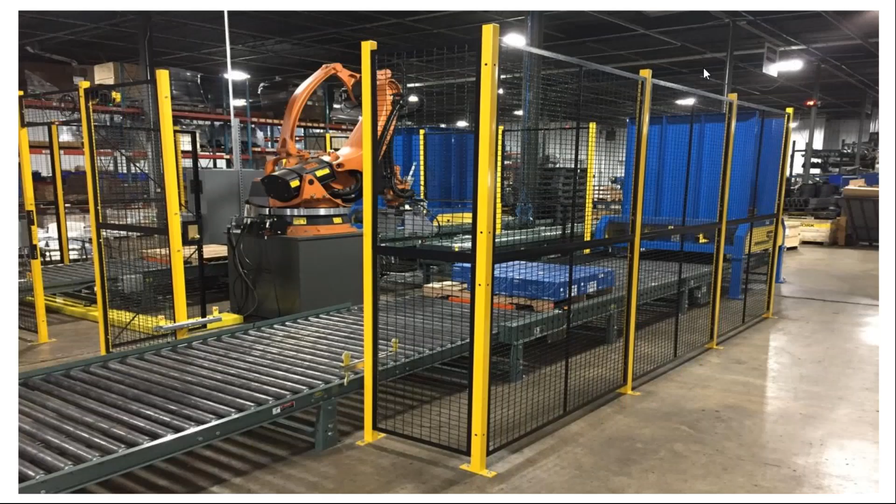This is the principle of machine guarding, in which we discuss the point of operation and zero mechanical state. Under the zero mechanical state, we cover power off, power locked off, guarding, machine guarding, enclosure, fencing, and safety by position or location. All these points are covered under ZMS, and then in-going, that is in-running nip points, and safety by construction. So machine can be guarded.

That need or requirement depends on the conditions. The guarding may be needed because the point of operation is not safe. That may require power off automatically, with the help of sensors - mechanical sensor or electrical sensor.

Some guarding can be done while running, and some guards can be constructed - that is called a fixed guard. Some guards need to be fixed at a particular place at a particular safe distance. So there are some principles of machine guarding which are listed here.

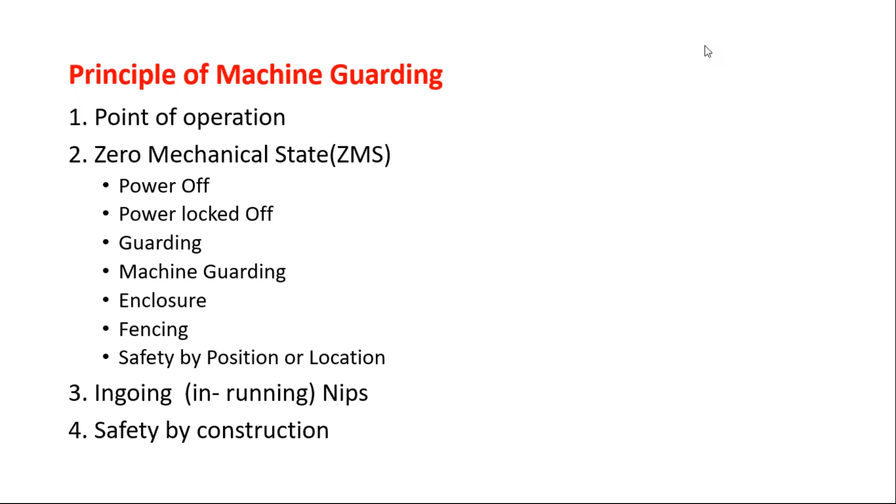Now, what exactly is the ergonomics of machine guarding? For that purpose, you must know the word ergonomic. It is a useful tool for fitting work to people, not people to work. Try to understand this - ergon means work, and nomos means the habit of law.

So you have to work according to the law, according to the sequence or procedural steps given by the organization, or the standards or rules and regulations. It is a useful tool for fitting the work to people. Whatever work, activities or operations are needed in your industry should be fitted and comfortable to the people, and for that purpose this ergonomic study is needed.

Now this ergonomics is related to machine guarding. Ergonomics is for the purpose of solving the problems of work habits.

It requires designing of proper workspace, working postures, reach, seat, controls, knob, brake, display, communication, skills, work intensity, sufficient time for rest, good environment, clear understanding, providing platforms or lift tables, carts, transport ways, proper storage racks, buffer stocks, good lighting, ventilation, housekeeping, proper guards, and good welfare facilities.

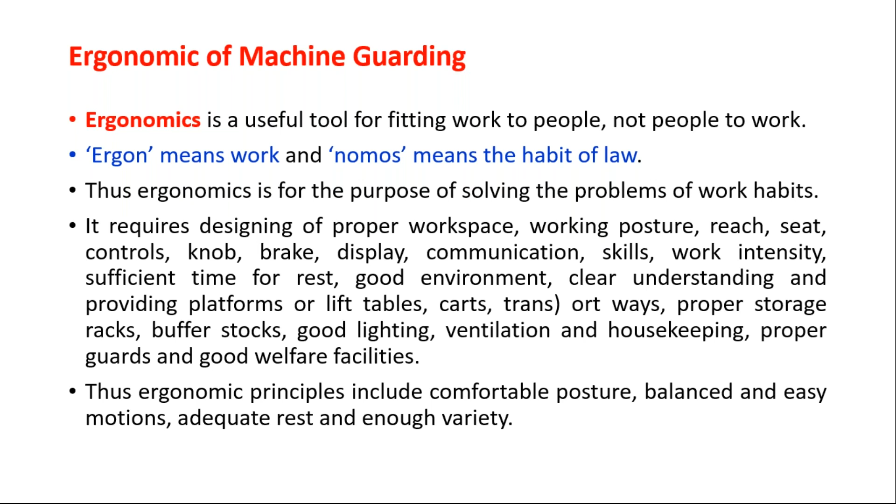The aim of ergonomics is to facilitate whatever a person wishes to do and ensure that he does it comfortably and efficiently. Efficiency includes effective work without detrimental health effects, and minimization of risk to the operator and others. For example, if there is a machine having rotatory parts, and due to that rotatory part, if you are not able to do this particular activity comfortably, then that may create some hazard, some hurdles for comfortable operation.

In some cases, the efficiency of a particular operation reduces due to uncomfortable working posture or uncomfortable working activities, such as rotating machinery which is unguarded. If you provide a guard to that machinery, it should be designed so that it does not become an obstacle to regular operations.

The working conditions, plant and infrastructure should be designed so that they are best fitted to the workers. The purpose is not to fit workers to any awkward, unsafe, unhealthy or uncomfortable work. We have to avoid awkward positions or postures, unsafe conditions, and unhealthy or uncomfortable work, fitting the guard so the worker can do the activity comfortably.

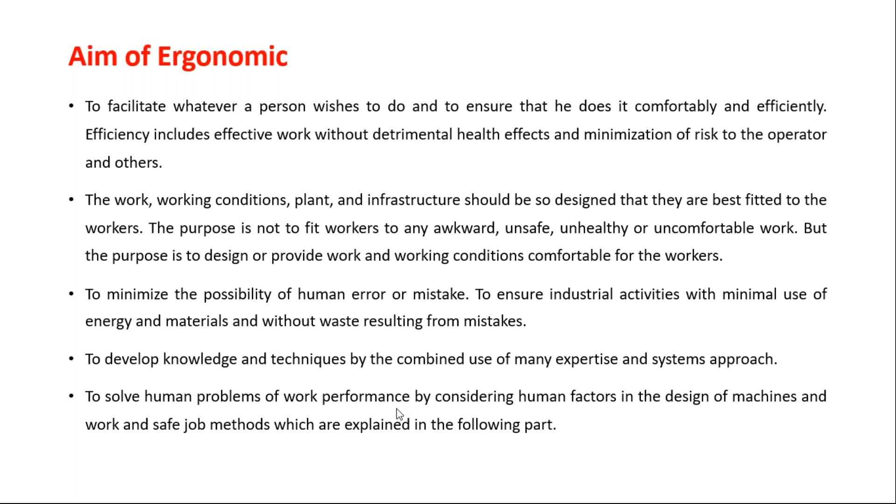There are some human factors in the design of machines and work. One is increased stress, which may be physical stress or psychological stress.

Then uninterested work. If the activity is not a routine activity, or if it is not interesting, or the person is not interested in that activity, then that may be a factor.

Then errors and accidents. Errors may be human error, or may be electrical or mechanical errors. And work-related diseases - some work may create diseases, such as heavy work, chemical handling, or work in environments where gases or fumes are generated.

Awkward body position causing difficulty - in some cases like welding operations, grinding operations, rolling operations, and various machinery operations, this awkward body position may be a difficulty.

Repetitive tasks producing boredom and tiredness. If you do some activities and tasks in a repetitive manner, there may be a problem, because due to the repetition fatigue may be created, and due to this fatigue, boredom and tiredness may be generated.

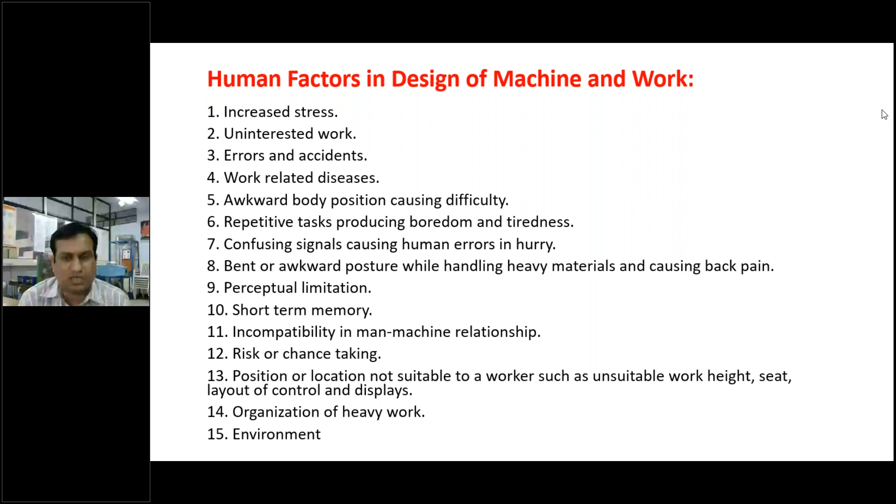Then confusing signals causing human error in a hurry. Some signals may be provided manually by persons, and some signals may be provided by machinery. If the signals are not appropriate or not clear, then they may cause human errors when in a hurry.

Bent or awkward postures while handling heavy materials cause back pain. We have studied how to lift heavy materials, the exact limits in terms of kgs depending on age and sex, whether male or female. All these guidelines should be followed - if not followed, it causes back pain.

Then perceptual limitations, and short-term memory issues, which may be a problem while doing activities or operations in a continuous manner. Then incompatibility in man-machine relationship.

Some persons are always comfortable with manual operations, and some are always comfortable with automatic operations. So in a relationship between man and machine, if the person lacks training or experience, incompatibility may be generated - that person is not compatible with the machine, which may also create a hazard and chances of accidents. Then there is risk or chance taking.

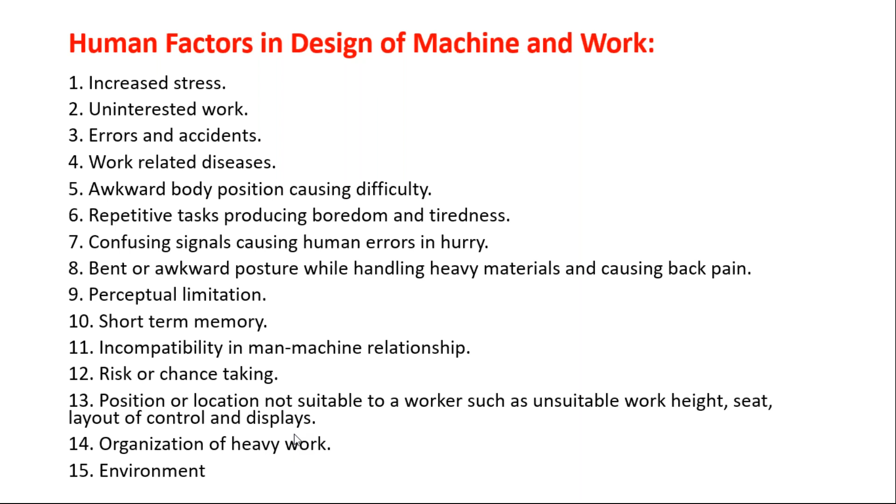So basically, machine guarding is to protect against contact. The point of contact is one of the important factors with dangerous and moving parts, especially. Where operations involve some machineries or moving parts, there are chances of accidents. So we have to avoid this point of contact. How do we avoid this point of contact?

By providing machine guarding. Sometimes work in process and failure due to mechanical, electrical, chemical, or human causes - the guards remove worker fear and thereby increase their morale and production. If guards are provided at that particular point of contact where dangerous operations or moving parts are, then obviously the morale is going to boost for that worker, because he or she knows there are fewer chances of accidents with that particular operation.

The guards remove worker fear and thereby increase morale and production. They allow operation at higher speeds and compensate expenditure on guarding. If you increase speed at or below the safety speed with the help of these guards, you can continue production, increase efficiency as well as the utilization of that machinery, and thereby compensate the cost or expenditure on guarding.

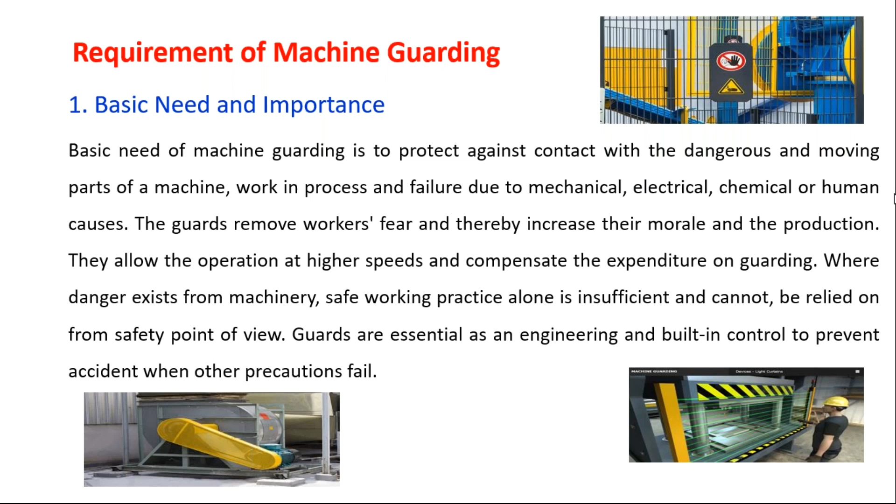Now some statutory requirements are also the need for guards. Statutory means the requirement given under the acts or rules. This statutory requirement may be at the national level, state level, or also at the international level.

At the international level, ILO guidelines are there, and International Labour Organization Convention 119 and Recommendation 118 explain the guarding of machineries. That is the statutory requirement at the international level.

Then at the central or national level, the Factory Act of 1844 in England and the Factory Act of 1881 in India, with amendments in 1891 and the last amendment in 1948, again focus on the guarding of machineries. In the Factory Act 1948, Chapter 4 clearly mentions the provisions of sections on safety, which includes some provisions for machine guarding - that is again a central or national level requirement. Some of the definitions related to this machine guarding in the Factory Act are given.

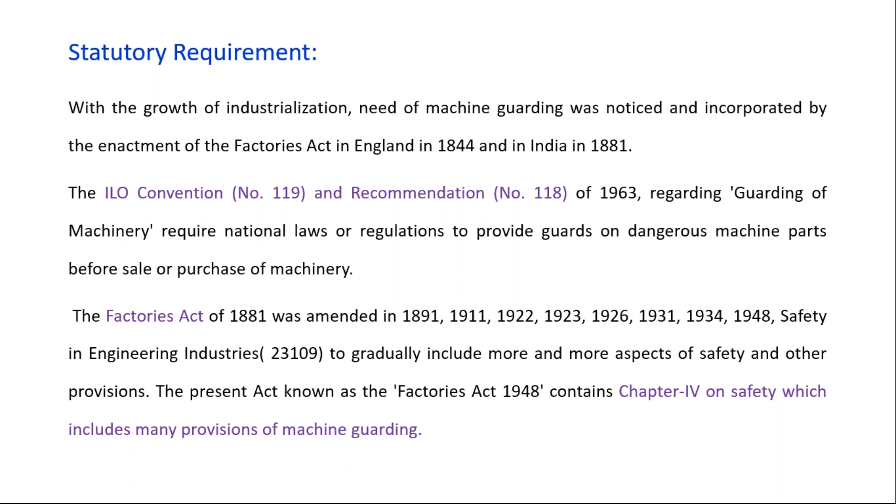So power is electrical energy or any other form of energy which is mechanically transmitted and is not generated by human or animal agency. Prime mover is any engine, motor or otherwise which generates or provides power. Transmission machinery means any shaft, wheel, drum, pulley, system of pulleys, coupling, clutch, driving belt, or other appliance or device by which the motion of the prime mover is transmitted to or received by any machinery or appliance.

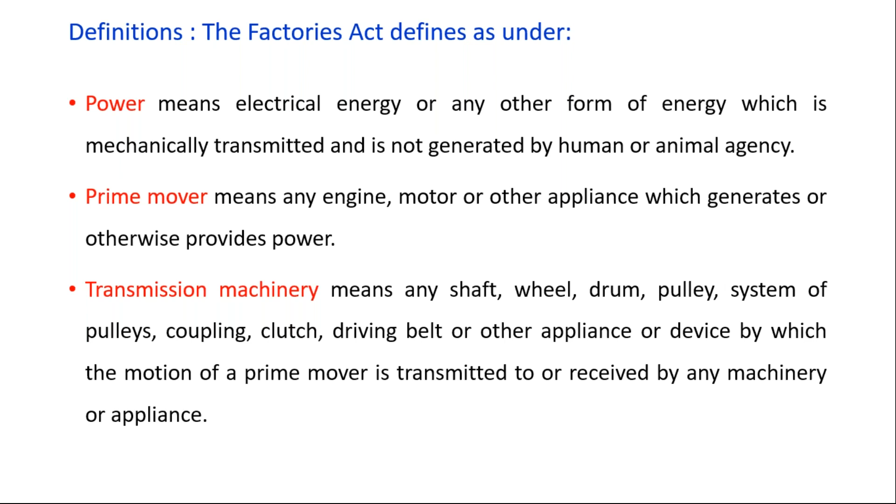All these are definitions from the acts, and that is why they are specific definitions, so you can understand these terminologies related to machine guarding. Machine includes prime movers, transmission machinery, and all other appliances whereby power is generated, transformed, transmitted, or applied. Belt includes any driving strap or rope. Maintained means maintained in an efficient state. The efficiency should be maintained, efficiency can be improved, and you can also apply this guarding in an appropriate manner for comfortable operation.

The fencing of machinery is one of the sections related to guarding of machinery. Section 21 requires that every moving part of prime mover, flywheel, head race and tail race of water wheel and turbine, lathe, electric generator, motor, rotary converter, transmission machinery, and every dangerous part of any other machinery shall be securely constructed, positioned, or fenced by safeguards of substantial construction, and constantly maintained and kept in position while the parts of machinery they are fencing are in motion or in use. So the parts directly mentioned in section 21 - prime mover, flywheel, turbine, lathe, generator, etc. - must be provided with machine guards.

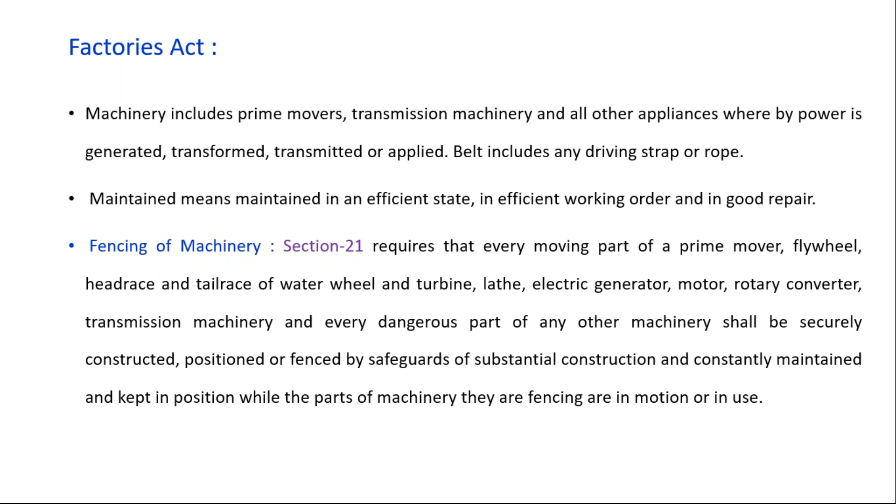Section 22 requires that any examination, lubrication, adjusting, operation, mounting or shifting of belts while the machinery is in motion shall be carried out by a specially trained male worker wearing tight-fitting clothing supplied by the occupier, and his name shall be recorded in the register in form number 8. So if you want to do examination, testing, lubrication, adjusting, operation, mounting, shifting, etc., you have to provide a trained person only, registered in form number 8, as mentioned in section 22.

Such worker shall not handle a belt at a moving pulley unless the belt is not more than 15 cm in width, the pulley is in a normal drive - that is no flywheel or balance wheel, only a simple pulley - the belt joint is laced or flush with the belt, the pulley joint and pulley rim are in good repair, there is reasonable clearance to work, secure foothold and handhold are provided, and any ladder being used is secured, fixed, or held by a second person.

So all these activities have restrictions on how they are run - the 15 centimeter width restriction, and another restriction that a second person should support some of the activities. At the time, other parts in motion should be securely fenced to prevent contact, so you have to take safety precautions to avoid accidents or mechanical hazards.

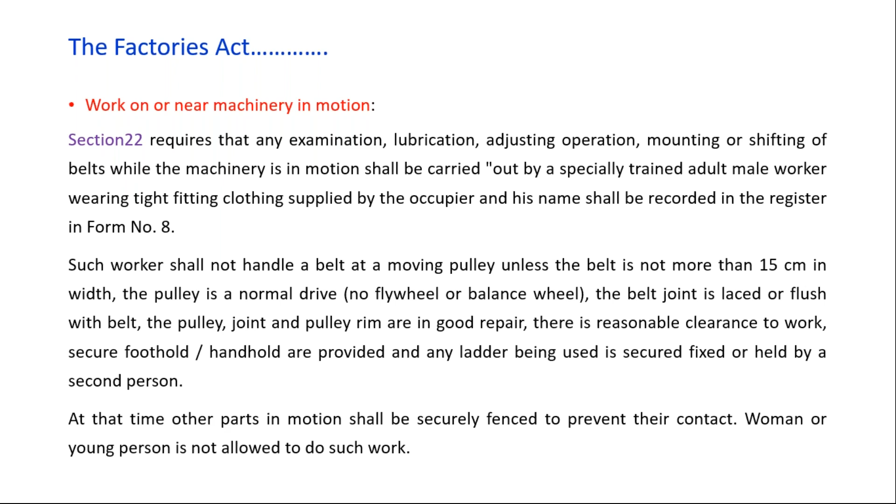Women or young persons are not allowed to do such work, and only male persons or male candidates are allowed to do such work. Then there is the employment of young persons on dangerous machines.

We have already discussed these sections under the important Factory Act sections. On power presses, except hydraulic presses, milling machines, guillotine machines, circular saws, and printing machines, no young person shall work unless he has been fully instructed regarding their dangers, precautions to be observed, has received sufficient training to work on that machine, and is under adequate supervision by a person who has thorough knowledge and experience of that machine. So only experienced, knowledgeable, adult persons are allowed to do dangerous operations.

Striking gear and devices for cutting off power: suitable striking gear or other efficient device to drive belts to and from fast and loose pulleys, and to prevent the belt from creeping back onto the fast pulley, should be used and maintained. Driving belts not in use should not rest or ride upon shafting in motion, for which belt hangers are necessary. Other devices for cutting off power are necessary in every workroom, and such devices shall be so locked as to prevent accidental starting of the machinery.

So we have to apply the LOTO system, that is lockout and tagout systems, when you do such type of work, because we cut off the energy supply, may be electrical energy, steam energy, air energy, or some other utilities. So depending on the type of work, we have to cut off the supply, and for that purpose, LOTO system is the best system, and another system is the work permit system.

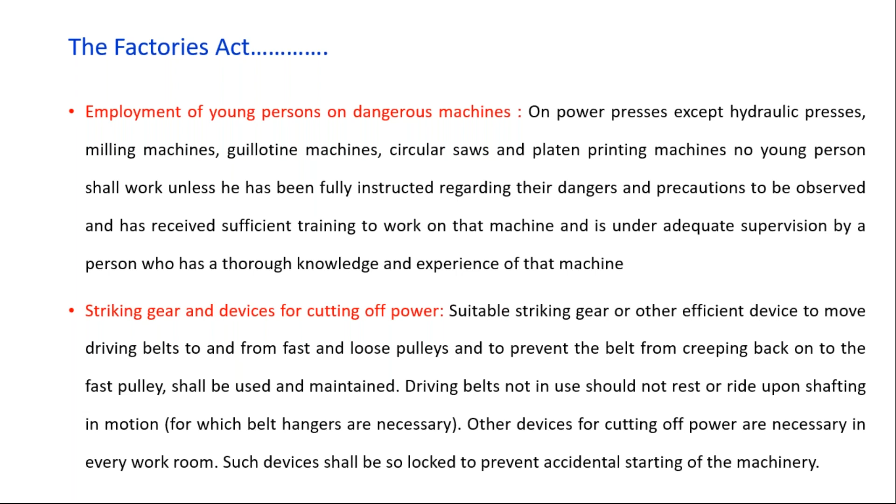Self-acting machines: 45 centimeters or more clear space is necessary from the end of maximum traverse of any self-acting machine or material carried thereon. So 45 centimeters is the main factor where you can understand what clear space is required in the industries.

Casing of new machinery: every set screw, bolt, key, or gearing shall be completely encased or guarded to prevent dangers. This casing is nothing but the covering required for every new machinery.

Then work near cotton openers. No woman or child shall work in a room where a cotton opener is at work, unless the feed end is fully partitioned from the delivery end, in which case their employment on the feed end side is permissible. This applies for cotton openers only, because these are old sections and old laws, from when the textile industry was one of the major industrial sectors, and that is why these guidelines are given.

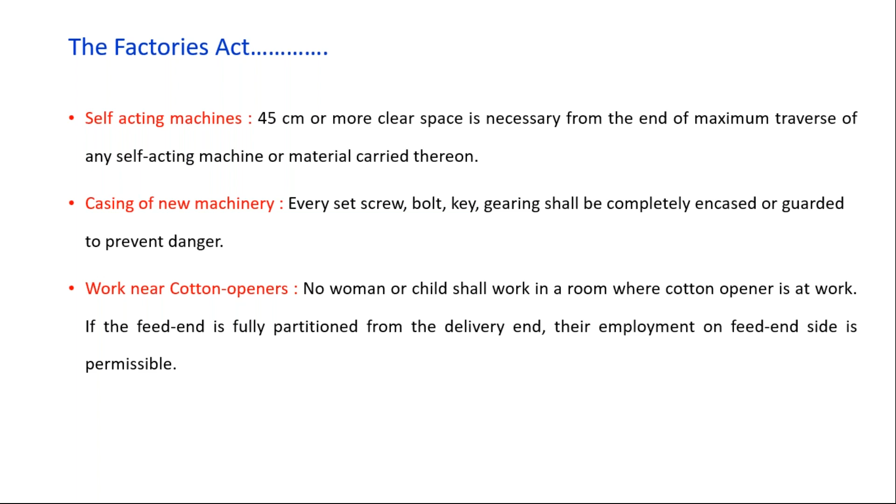Then revolving machineries. Under this factor, there are specific guidelines under the Maharashtra Factory Rules also, related to revolving machineries. Effective measures are necessary to ensure that safe working peripheral speeds are not exceeded.

So on the revolving machinery, there is a point where it is clearly mentioned what is the maximum permissible speed or maximum working peripheral speed of a particular grinding wheel, revolving vessel, cage, basket, flywheel, pulley, brake, or similar appliance running by power. All the testing for these rotations is done by manufacturers as per the IS standard, and that is why these limitations or maximum permissible limits are given on revolving machineries.

A notice indicating the maximum safe peripheral speed of the grinding wheel, the speed of the shaft or spindle upon which the wheel is mounted, and the diameter of the pulley required to secure the safe working peripheral speed of the grinding wheel shall be affixed near each such machine, and an effective brake is also required.

So in some cases, if the speed is not controllable and there are chances of accidents, you can use an effective brake also. For that purpose, this effective brake system is to be provided for revolving machineries.

Then further safety precautions. Rule 54 prescribes machine guarding details in respect of textile machineries, cotton gin machineries, woodworking machineries, rubber mills, centrifugal machines, power presses, shears, splitters, and guillotine machines. All these machineries, their operations, and guidelines are given under rule number 54 of the Maharashtra Factory Rules 1963, and some other state rules also. The rule number may be plus or minus different, but the guidelines are nearly the same for safety precaution purposes.

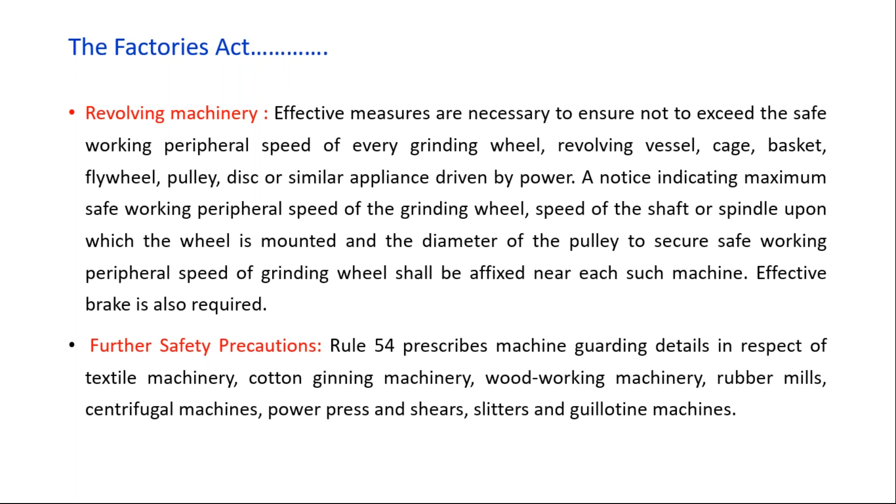Then elimination of hazards. If it is possible to reduce or eliminate a particular hazard related to the machineries or operations, the operations may include crushing, shearing, cutting, severing, entanglement, drawing in or trapping, impact, stabbing, puncture, friction, abrasion, ejection of material from machines, contact with a moving part or point of contact, hot surfaces or sharp edges, free fall of any material, tool or equipment, and high pressure fluid ejection.

So for these types of operations, if it is possible to eliminate that hazard, you should eliminate it. So what are the basic steps to prevent accidents due to these operations or machineries?

First, eliminate the hazard from the machine, method, material, and structure. Control the hazard by enclosing or guarding it at its source. Then train personnel to know the hazard and to follow the safe job method to avoid it. And then use personal protective equipment if necessary.

So we have to first try whether this hazard can be eliminated or not. If it is feasible, then you must go for the elimination method, and this hazard identification and prevention technique can be adopted for the elimination of this type of hazard to prevent accidents.

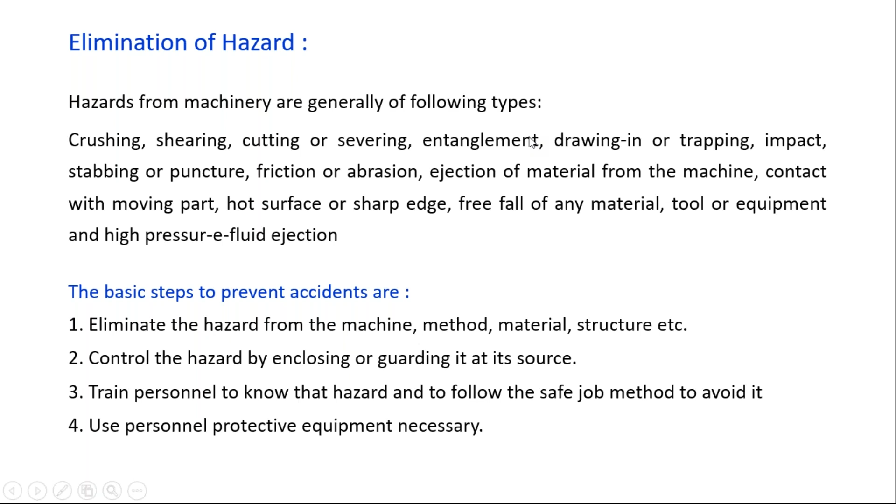In the industries, there are various operations and various types of machinery, and there are various types of hazards related to these machineries. That is why dangerous parts are grouped according to their motions. Group one is rotary motions.

The motion type is rotary. So what are the operations, hazards, and precautionary measures? For group one, rotary motions, rotary parts alone include shaft, coupling, spindles, projections on moving parts, flywheel, saw, gear, knife cutting tools, etc. All these are examples of rotating parts alone.

In-running nips, it is subdivided as between parts rotating in opposite directions. The gearing mechanism we all know, found in watches, vehicles, and some machineries. There is a gear moving clockwise and another gear moving anti-clockwise, so there is rotation between these parts in opposite directions.

In a similar way, there may be rollers, used in paper mills, rubber industries, or other industries. In roller machines also, there are opposite directions: one roller moves clockwise and another roller moves anti-clockwise.

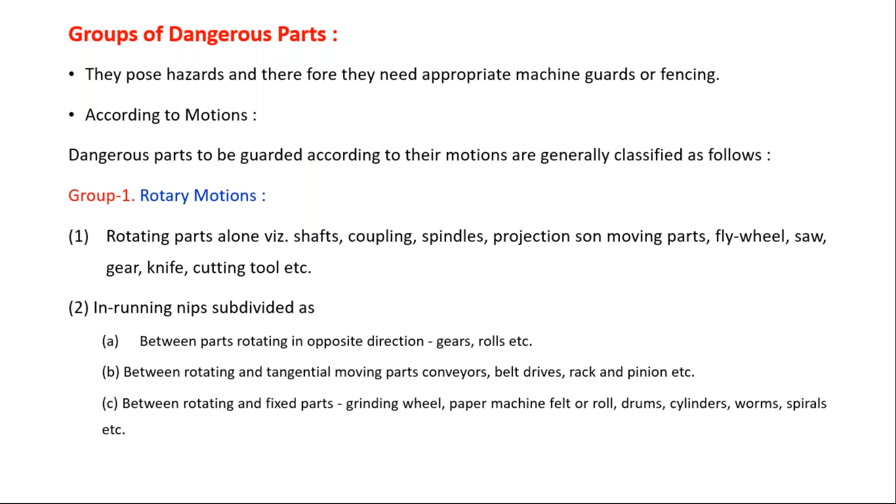In group 2, we have reciprocating sliding motions. Under reciprocating sliding motion with a fixed part, there are two types - approach type and passing type. Under approach type, there is danger of crushing at slides or rams, meaning striking on power presses, forging hammers, pistons, cross rod of steam engines, and riveting machines.

If you are not from an engineering background, you should observe diagrams, images, or videos related to these operations so you can understand what type of hazard is involved and why there are chances of accidents.

The other type is passing type. Danger of shearing is found in planing machines, shapers, spot welders, clamping fixtures, guillotine and shear, power press, etc. All these machineries and their shearing operations are involved under this passing type, where material is passed through for the shearing process.

The second point under reciprocating sliding motions is single sliding motion. Abrasive or sharp nature objects such as saws and crocodile clips on belts are examples of this single sliding motion.

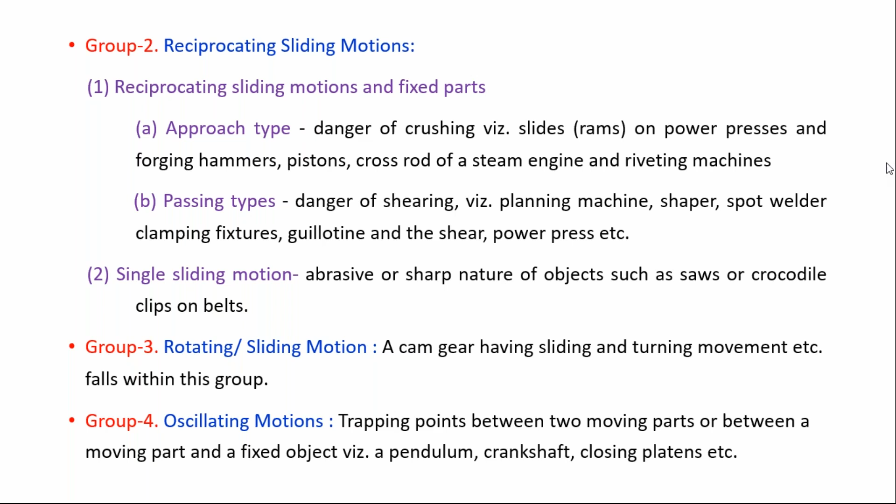Now, on the basis of these groups, we have to decide which type of guard is suitable or comfortable for this type of activity to reduce the hazard. But before finalizing this type of guard, we have to think about the human factors, already discussed in the previous slide. For comfortable and safe operation, for reducing hazard and risk, we have to finalize the type of guard.

The guards may be a fixed guard, an interlock guard, an adjustable guard, or a self-adjusting guard. The classification may differ at different sources, but we should understand at least these basic types of guards.

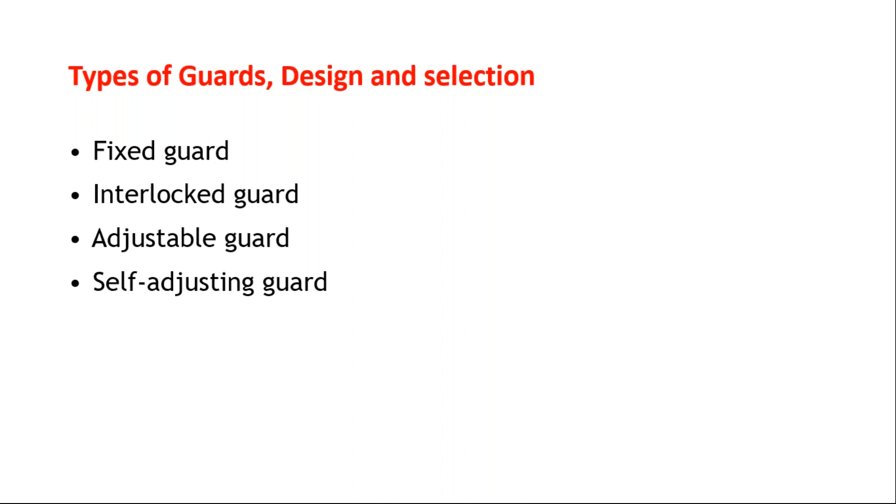This is a fixed guard of machine. From this picture you can observe these guards are fixed on the machinery itself. So the point of contact is zero when the guard is fixed. While operating or rotating this particular part, you are safe from the rotating part, which may be at speeds of thousands of RPM, depending on the part and machinery. You can provide the fixed type of guard if the machine is used on a continuous basis, and if you want to avoid the point of contact, you should provide this fixed type of guard.

Then there are interlock guards of machines. The revolving drum here is not 100% fixed type of guard, not 100% protected. But where there are chances of contact, that part is protected by this interlock guard. This interlock guard is not fixed type - you can remove it as per requirement, whenever there is repair or maintenance work, and after that, before starting again, you have to provide this interlock guard to the machine.

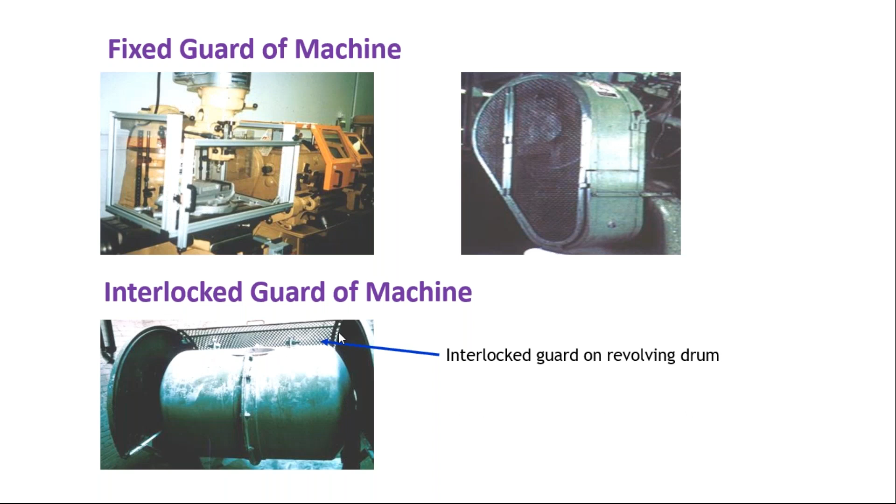Then this is an example of an adjustable guard of machines. You can provide this guard as per your requirement. It is bandsaw blade adjustable with the adjustable guards. Depending on the type of work, the time of work, and the type of hazard, we can provide these adjustable guards. The movement of this guard can be adjusted with the help of a screw or pinion arrangement.

This is the self-adjusting guard. You can use this self-adjusting guard for operations like this, because in the circular table saw, normally these are open, and in this case, this self-adjusting guard is provided. You can remove this guard, you can adjust this guard as per your requirement, but you have to provide this guard to reduce the hazard.

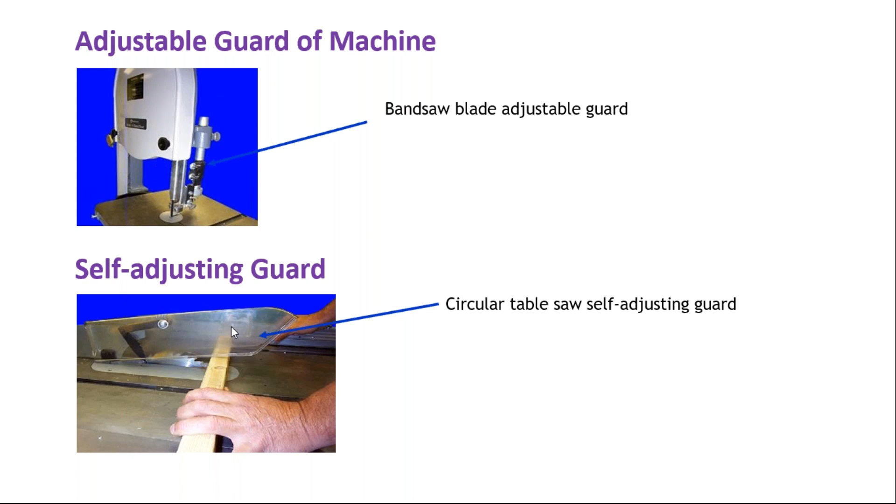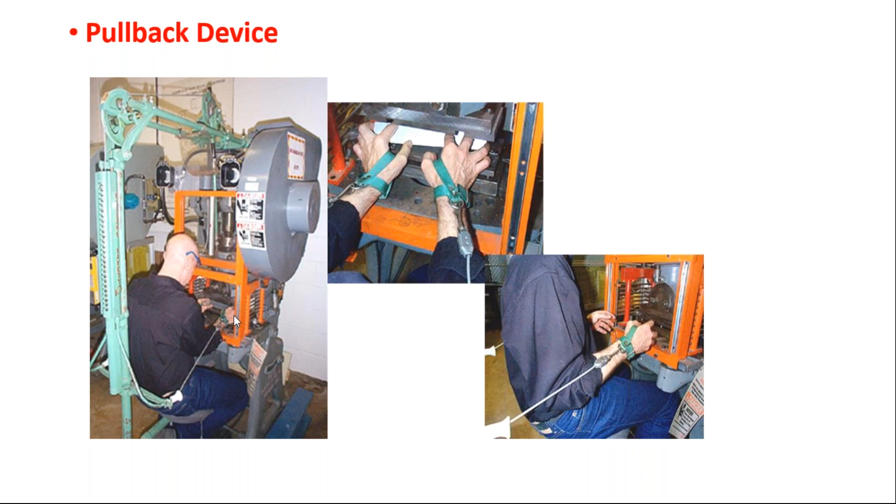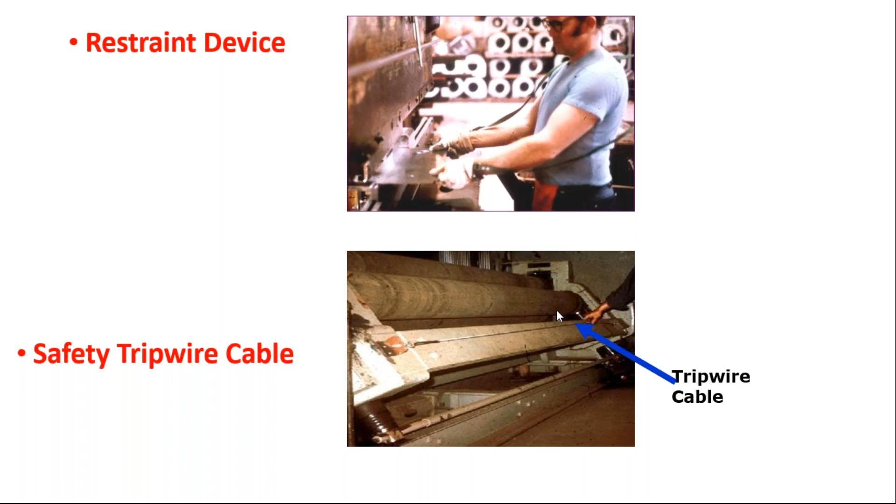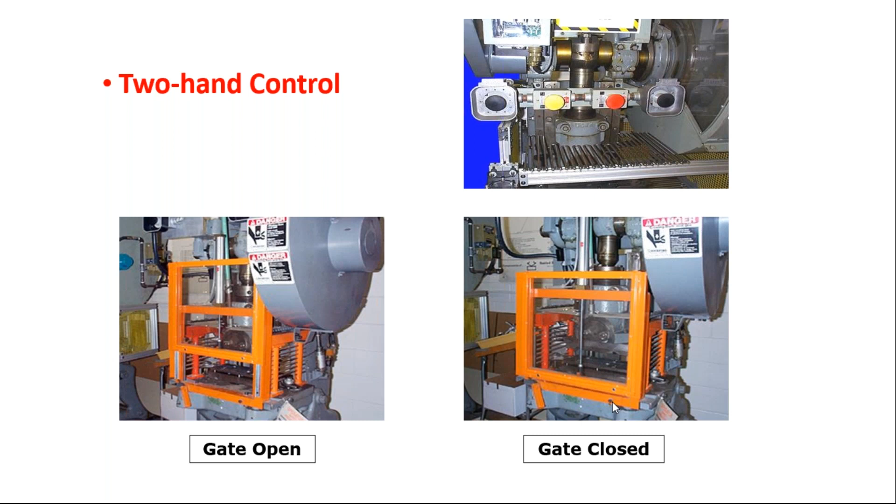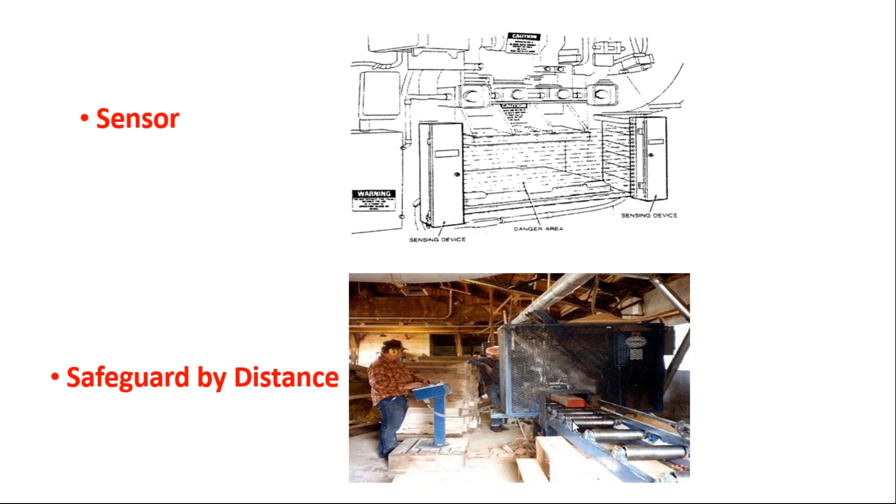Nowadays robotics can be applied and utilized by companies, specifically in areas where press machines or heavy cutting machines are there, or where hazardous or toxic chemicals are utilized continuously. For example, in the automobile industry, in the spraying of colors or the painting section, where solvents and chemical compounds like paints are used continuously.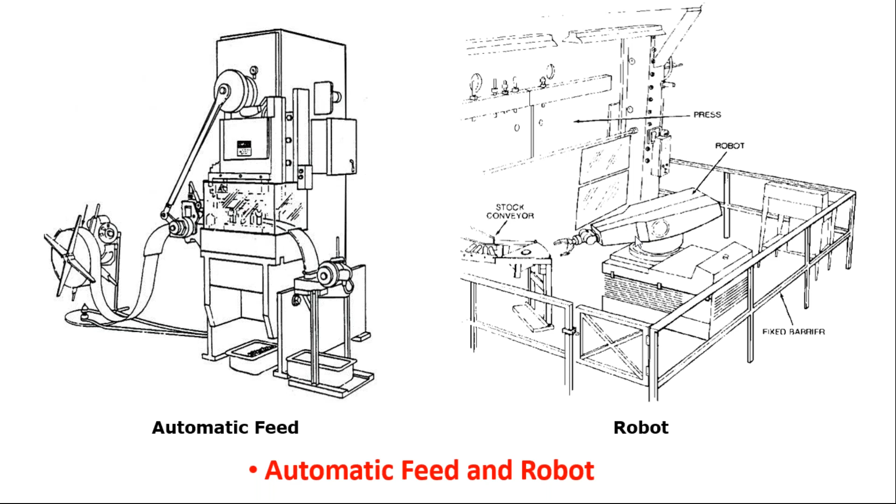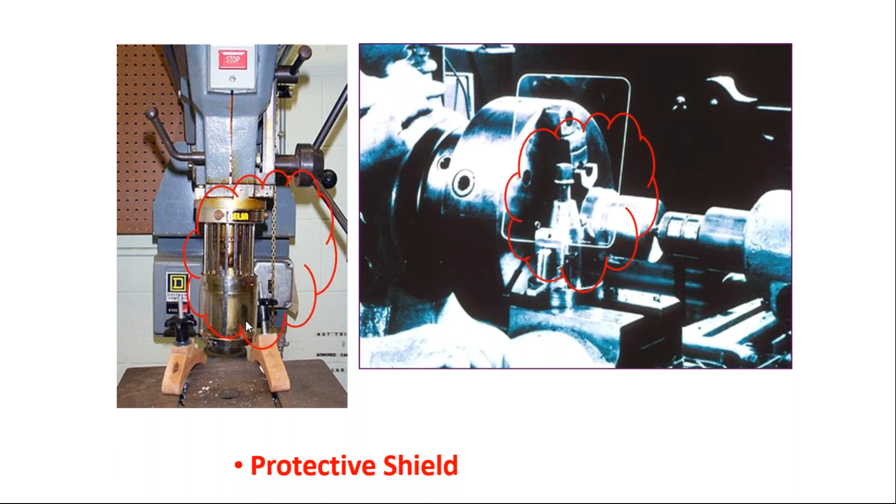In the same way, in the old days, we were using these lathe machines or similar operations where the point of contact is open, but we have to apply this protective shield to avoid the point of contact. Thank you.